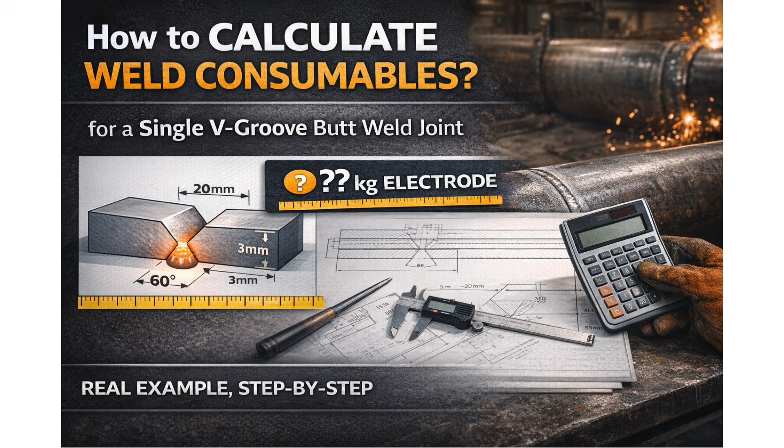Order too much, you've tied up budget and storage on material that just sits there. In this video, I'll show you exactly how to calculate weld consumable for a single V-groove butt weld joint, the most common joint type in structural and pressure vessel fabrication. We'll break down the groove geometry, calculate the area step by step, find the weld volume, and convert it into actual kilograms of electrode for any welding process. All with one real-worked example. Stay with me, this is simpler than it looks.

Before we get into the numbers, let's be clear on why this calculation matters in the real world. First, cost control. When you know exactly how much consumable you need, you buy exactly that amount, no over-purchasing. Second, no last-minute panics. Running out of electrodes on a critical weld can halt an entire fabrication line. Third, vendor management. If you are supplying consumables to a subcontractor, you give them precisely what they need.

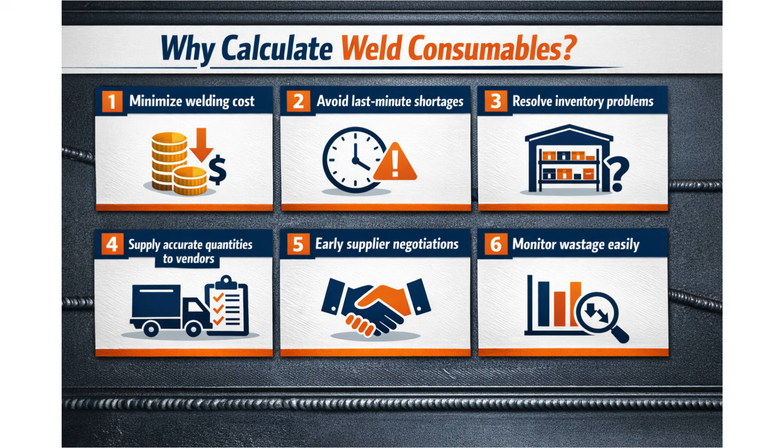And here's the one most people overlook: wastage monitoring. When you know the theoretical consumption, and you compare it to what was actually used, that gap tells you everything about your welding efficiency, your stub losses, your spatter levels. It's not just a purchasing tool. It's a quality and efficiency tool.

Now let's calculate. Let's define our joint. We have a single V-groove butt weld with the following dimensions, as specified on the engineering drawing. Plate thickness T equals 15 mm. Bevel angle equals 35 degrees on each side. Root gap G equals 3 mm. Reinforcement height R equals 3 mm. Total weld length equals 1000 mm, that's 1 meter. And our material density, carbon steel, is 7.85 grams per cubic centimeter.

Now here's the key insight with any groove calculation: don't try to calculate the entire cross-section as one complex shape. Instead, break it down into its simplest components. For this V-groove, we have 4 parts: 2 triangles forming the bevel, a rectangle at the root, and a rectangle at the cap reinforcement. Calculate each area individually, add them together, and you have your total groove cross-section.

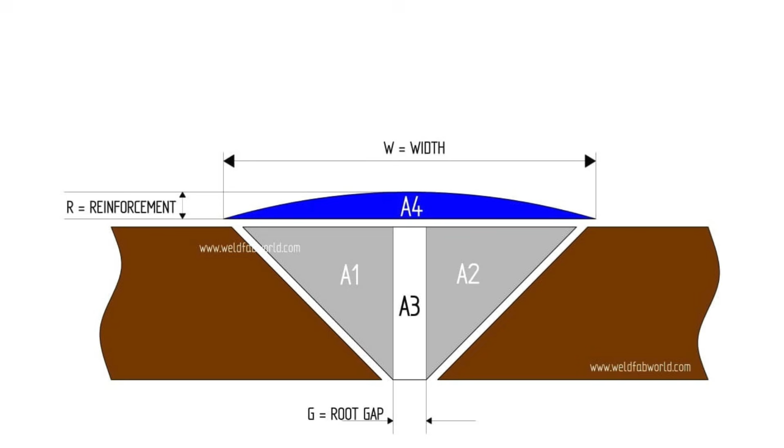Simple geometry. Let's start with part one, the root rectangle. This is the simplest shape. It's a rectangle with a width equal to the root gap, 3 mm, and a height equal to the plate thickness, 15 mm. Area of part one equals length times breadth equals 15 times 3 equals 45 square millimeters.

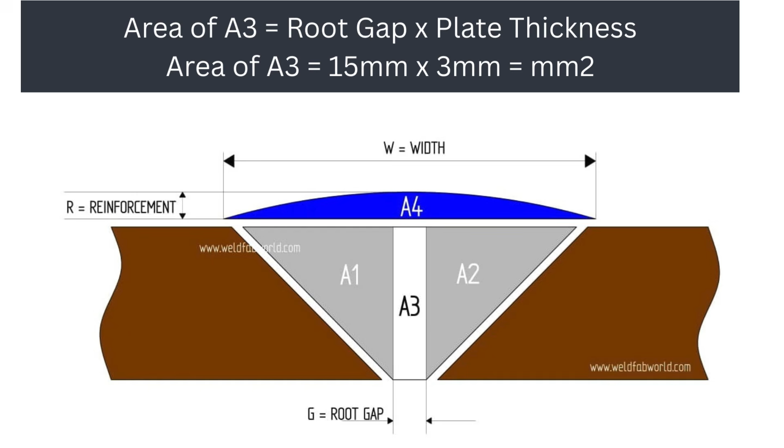Parts two and three are the bevel triangles, one on each side of the groove. Because the bevel angle is equal on both sides, their areas are identical, so we calculate one and double it. For a triangle, area equals half times base times height. The height is the plate thickness, 15 mm. The base we calculate using trigonometry: it equals tangent of 35 degrees, multiplied by the plate thickness. Tangent of 35 degrees is 0.7002. So the base equals 0.7002 times 15 equals 10.503 millimeters. Area of part two equals 0.5 times 10.503 times 15 equals 78.77 square millimeters. And part three is the same, 78.77 square millimeters.

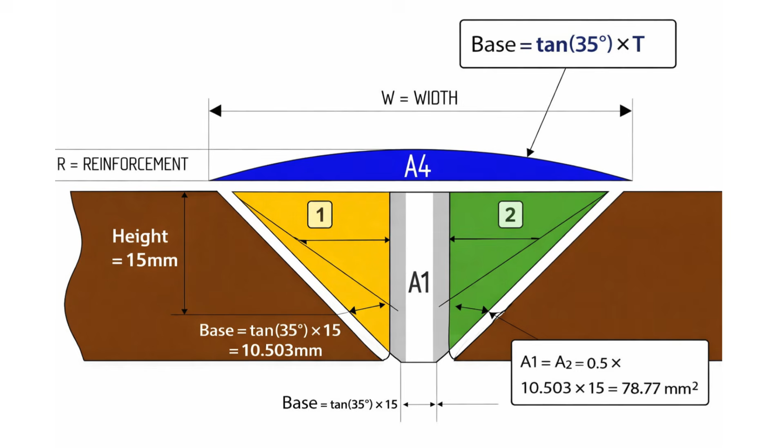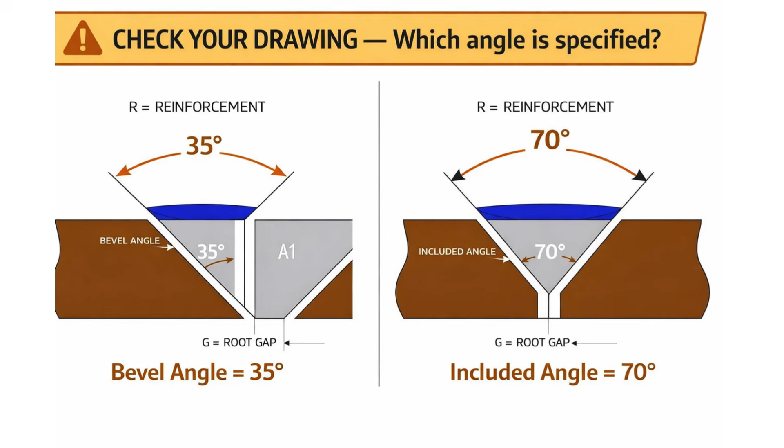A quick note on the bevel angle. The 35 degrees here is the angle from the vertical, the angle of each individual bevel. So the total included angle of the groove is 70 degrees. Always check your drawing carefully. Some drawings show the included angle, some show the bevel angle. Know which one you have.

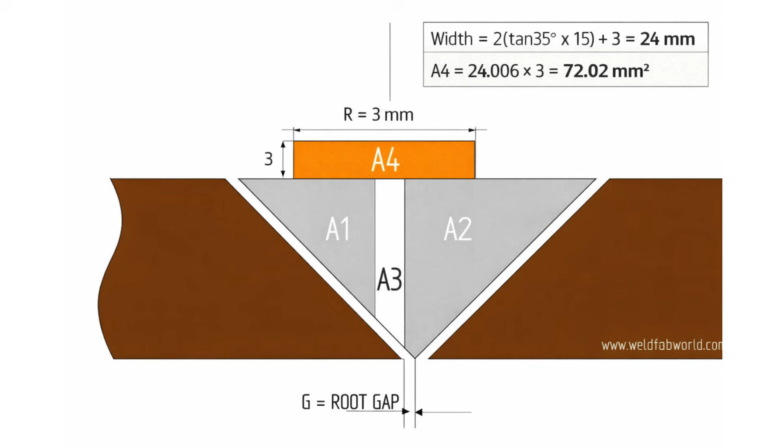Part 4 is the reinforcement, the weld cap that sits above the plate surface. This is approximated as a rectangle. The height of the reinforcement is given as 3 mm. The width of the cap spans the full top of the groove. Width equals 2 times tangent 35 degrees times plate thickness plus root gap. Width equals 2 times 10.503 plus 3 equals 24.006 millimeters. Area of part 4 equals 24.006 times 3 equals 72.02 square millimeters.

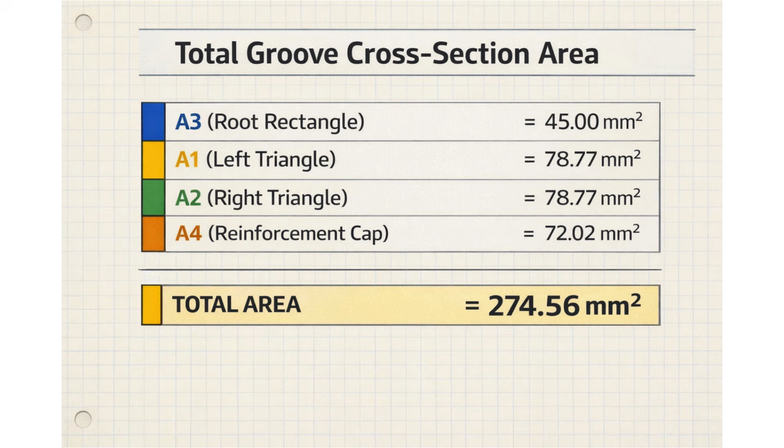Now we add all 4 areas together. Total area equals 45 plus 78.77 plus 78.77 plus 72.02 equals 274.56 square millimeters. That is the cross-sectional area of the weld groove, including the root gap and the reinforcement cap. Step 3 is straightforward.

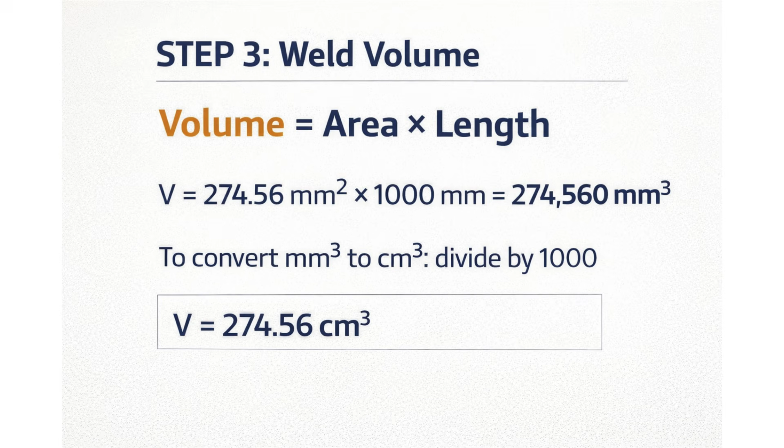Volume equals area multiplied by length. Volume equals 274.56 square millimeters times 1000 mm equals 274,560 cubic millimeters. Now we need to convert that to cubic centimeters, because our density is in grams per cubic centimeter. To convert cubic millimeters to cubic centimeters, divide by 1000. So volume equals 274.56 cubic centimeters. Keep an eye on your units throughout this calculation, it's the most common mistake.

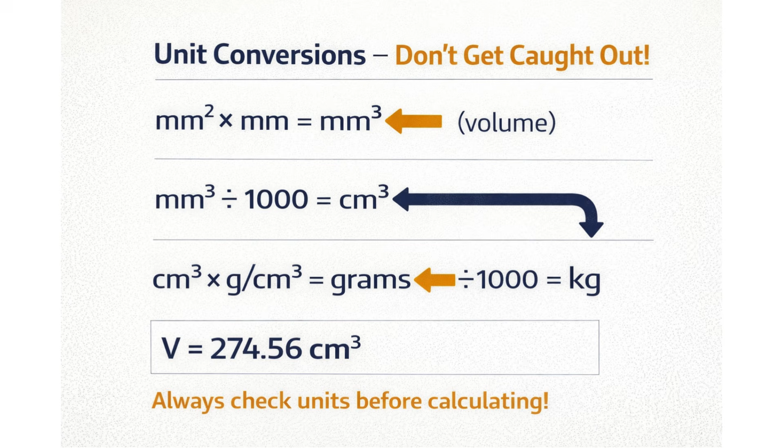Millimeters squared times millimeters gives cubic millimeters. Then divide by 1000 to get cubic centimeters. That's the unit that works with our steel density value. Step 4. Multiply volume by density to get the weight of weld metal deposit.

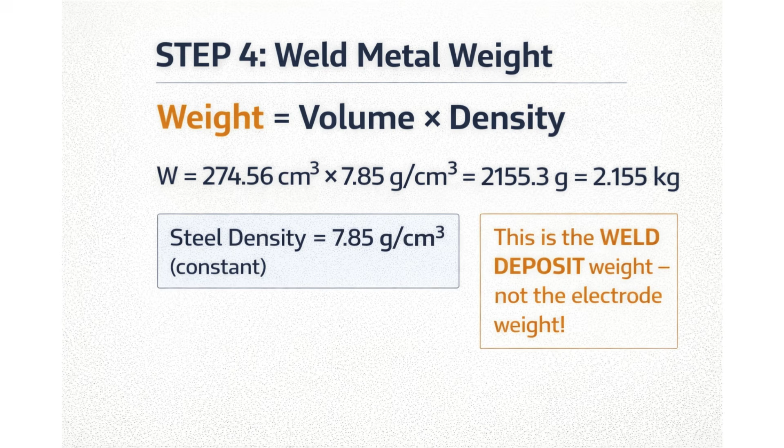Weight equals 274.56 cubic centimeters times 7.85 grams equals 2155.3 grams, which is 2.155 kilograms. Important. This is the weight of weld metal that needs to be deposited into the joint. It is not the weight of electrode you need to purchase. That comes in the next step.

This is where people make the big mistake. 2.155 kilograms is what ends up in the joint. But because not all of your electrode becomes weld metal due to spatter, slag, stub losses, you need more electrode than this. How much more depends entirely on which welding process you are using. And that's where deposition efficiency comes in.

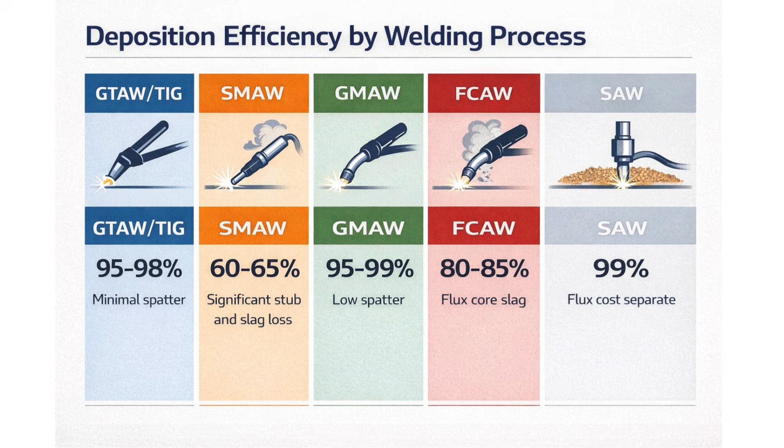Deposition efficiency reference table. To find actual electrode required, divide the weld deposit weight by the deposition efficiency. For SMAW at 62.5% efficiency, 2.155 divided by 0.625 equals approximately 3.45 kilograms of electrode. For GMAW at 97%, 2.155 divided by 0.97 equals 2.22 kilograms of wire. For GTAW at 96.5%, 2.155 divided by 0.965 equals 2.23 kilograms. And SAW at 99%, just 2.18 kilograms.

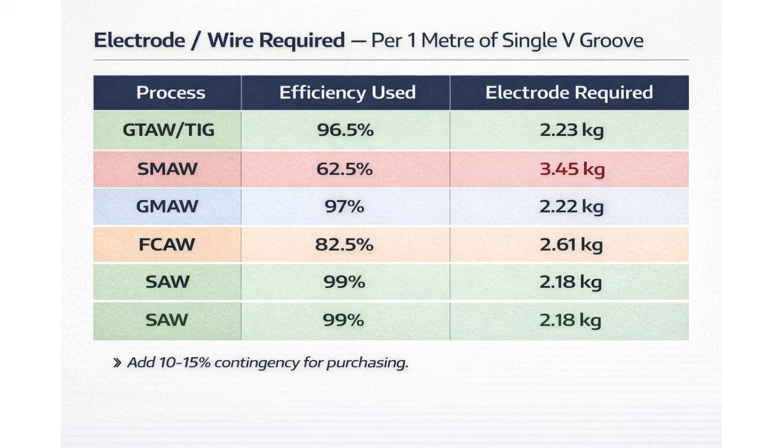Look at the difference between SMAW and GMAW in our example. SMAW needs 3.45 kilograms of electrode for this 1 meter of weld. GMAW needs only 2.22 kilograms of wire. That's a 35% difference in consumable cost, just from process selection. Now multiply that over a fabrication job with 500 meters of butt welds. Suddenly that difference is not just a number on paper, it's a very significant line item on your project budget. This is why prefabrication consumable calculation is a critical engineering task, not just an admin exercise.

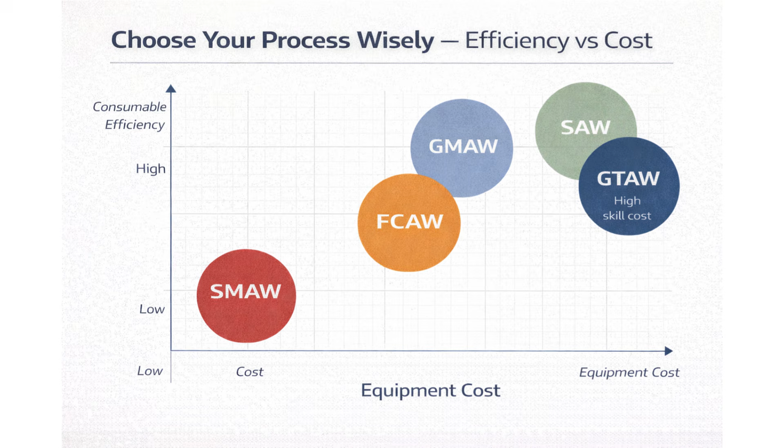One final practical point, always add a contingency buffer when placing your purchase order. A standard allowance of 10 to 15% above the calculated quantity accounts for setup welds, trial runs, wastage, and any re-welds required. So for our SMAW example of 3.45 kilograms per meter of weld, add 15% contingency and your order quantity becomes 3.97 kilograms per meter, round it up to 4 kilograms for simplicity.

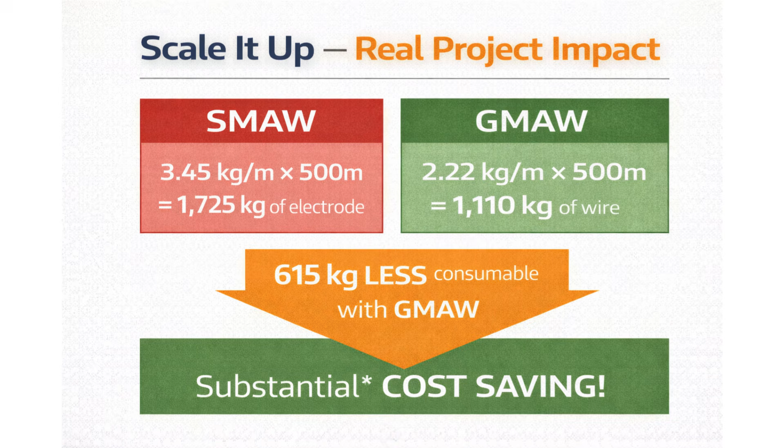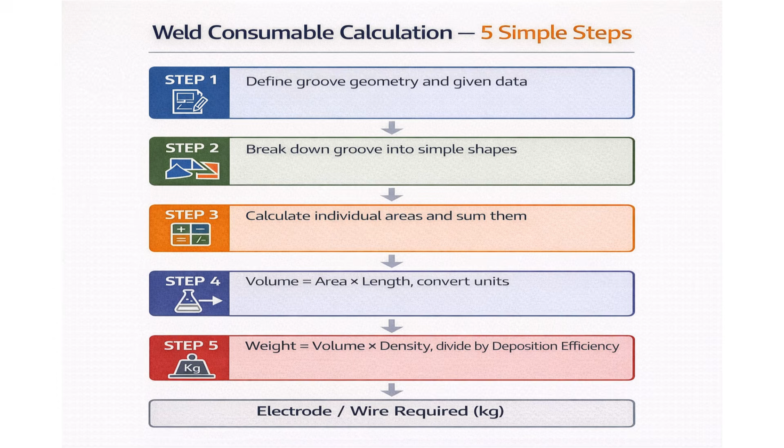Step 5. Multiply by steel density 7.85 to get weld deposit weight, then divide by deposition efficiency to get actual electrode or wire required. The method we just walked through applies to any V-groove butt weld, pipes, plates, pressure vessels. Change the inputs, the formula stays the same.